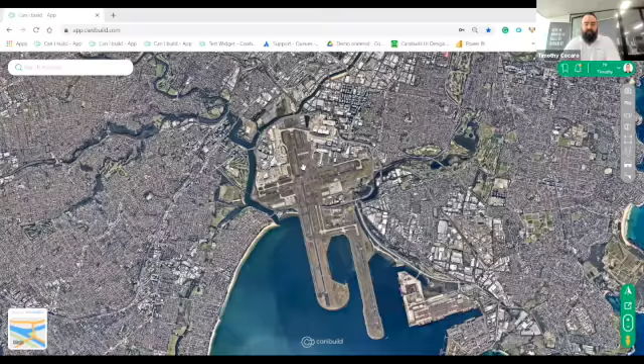For those of you joining for the very first time, welcome to Can I Build, and thank you for joining this presentation. I thought instead of starting over the Sydney CBD like I usually do, I'll start with just showing an airplane, just to remind ourselves that hopefully we'll be traveling soon and taking holidays, because we all know we've had a tough run, especially those in construction more recently. I hope you're getting through the shutdown and navigating all the rules and regs around getting people on site as well. But to kick things off, we've got our dashboard here.

We've got our search address bar at the top left-hand side. Lo and behold, we'll be going to an address many of you may be familiar with, and we'll be attending to that address.

Just a few very quick things to bring to your attention: we now showcase a bit of the context of this site. You can see here we're showing some of the trees around, and that's the same with services and other points of interest external to the actual block as well. So now you're able to get that next door tree and hover over it, or see the next door sewer line, services, or utilities. So we're giving that general context, which is a recent development we have done.

You may notice something new on the sidebar, just below Hi Timothy on the top right-hand corner. Second from the bottom is this little house showing ground floor. Basically, that's giving you a hint as to what's to come in this presentation for the double story.

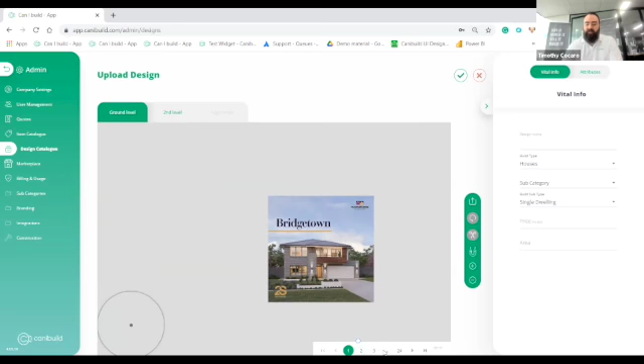For those of you that have come into this upload previously, you'll notice on the top you've got a ground level and a second level. You've also got a zoom panel on the bottom left-hand side to get that precision. On the bottom, you've got these page number tabs that you can flick through to pick the appropriate page. So let's go to a design that will fit my beloved 78 Hood Street.

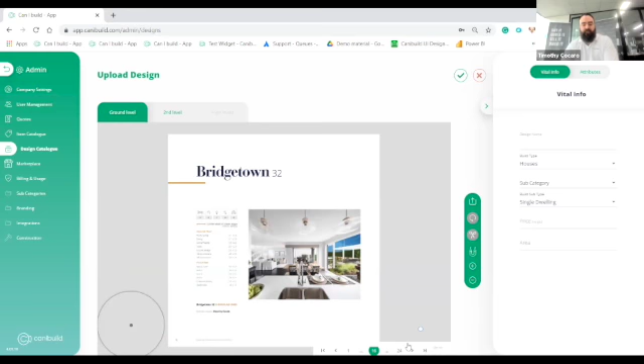And here we are, Bridgetown 32, which fits a 12.5-meter size block. The nice thing is you're able to use this PDF to now fill in attribute data on the right-hand side, making it easier to do it all in the one spot.

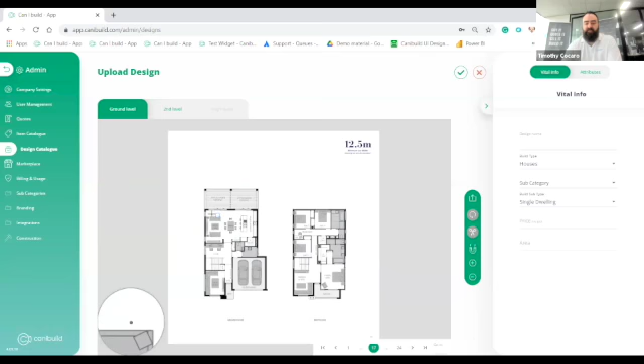So let's just start with the actual core functionality, which is to pick the design. We're on ground floor, we're seeing the design here, and now you're able to zoom in or use the zoom panel on the bottom left to get that precision. I've got a few questions coming through. Hi Tim, can I please include the zone area? Yep, 100% Mark, I'll send through that same email to yourself as well.

So if we zoom in, the first task is to crop the design. Basically you can use it in conjunction with the image you're seeing, the zoom in panel, and click on that. Now, the nice thing is you might notice these green guides—they keep you square.

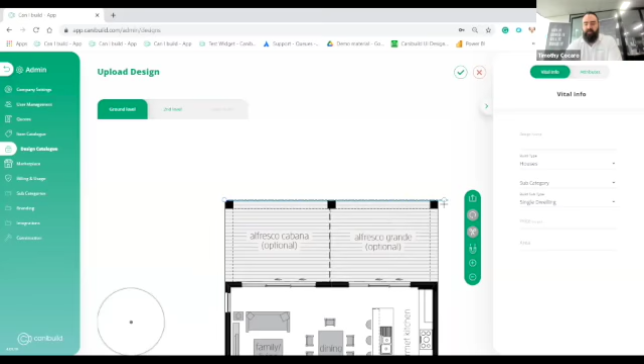If you click on the screen and drag, you're able to drag across as well, or simply zoom out and then zoom back into where you want to go.

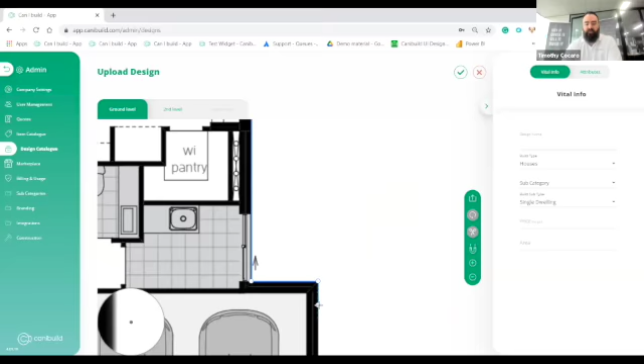You're able to get that nice precision, click on the edges, and simply drag and follow the edge around, because the first task is to crop this image from what's around it. You don't want to include the rest of this PDF, so let's just go around and crop this image.

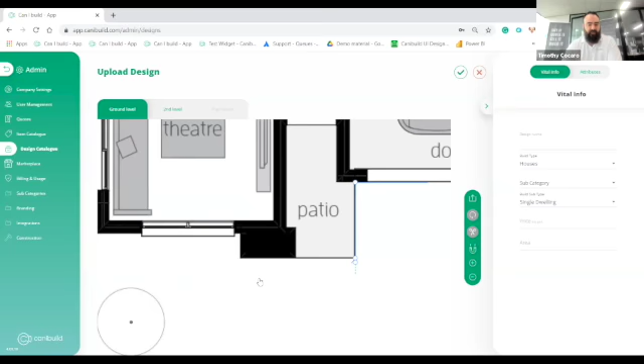Whoever's done this in the past, I'm sure you'll find this a much more pleasurable experience. I apologize to those of you who tried this previously, because it was a bit of a trial by fire.

But now we're able to crop around quite easily. You can see on the last one, it's actually guiding us to finish that node, so we're able to click on that one there, and we now know that we've lined up with this as well.

So now we've cropped this. You just click the scissors on the right here, and you're able to crop that image. We've now done a very nice and sharp crop of the floor plan.

We have a quick question: can I direct from my Chief Architect drawing file, or do I need to do it in a PDF? As of this stage, from the front end, it'll have to be from a PDF.

So you have to either take a screenshot of what you're seeing in your current application, like an image, and use that, or simply print a PDF from within the application. Hope that helps, Mary. So we've done this.

Now the other thing we want to do is start populating a bit of information on the side. We know that the design name is Bridgetown 32, so we can enter that. Maybe we'll mark it as version 3, since I think I've tested this twice before.

And then we've got houses, so we can click 2-story. These build subtypes, it's a single dwelling. We can still put the price.

Let's put 299,000. The area, I know accurately, is 297. So we've got that information there as well.

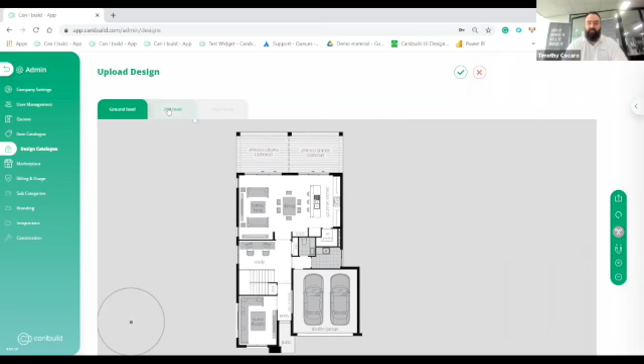Now, the key update and upgrade here is definitely the second level tab. We can click the second level, and it shows you the same PDF for you to start working on, leaving you on the same page, which is really great.

If you need to upload each floor plan separately, say for example it's on two separate pages, all you have to do is click the upload icon on the right here, and it'll ask you to upload a different file, replacing the current file for the second level.

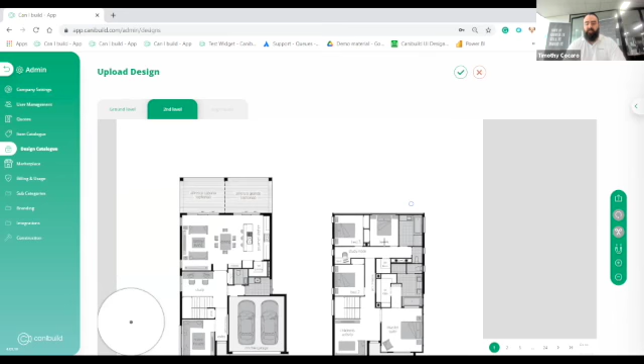So that's quite nice. Let's now crop this one in much the same way, and in combination, you can zoom into whichever level as well.

So let's do that very accurately, zoom in, and then start going around, and let's crop this second story.

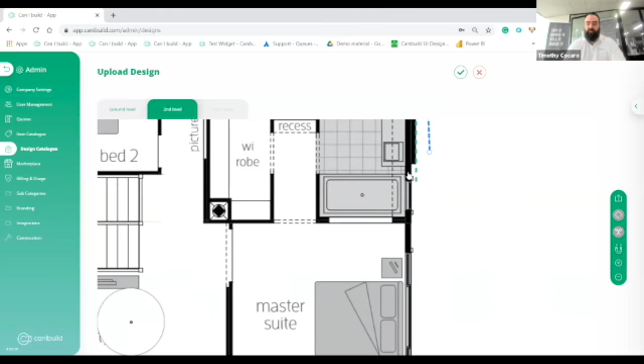Thanks for your patience, everyone. Definitely for those of you who aren't uploading yourselves, this might be a bit tiresome, but very quickly we'll show you how this looks on the actual plan itself, which we're very excited to do.

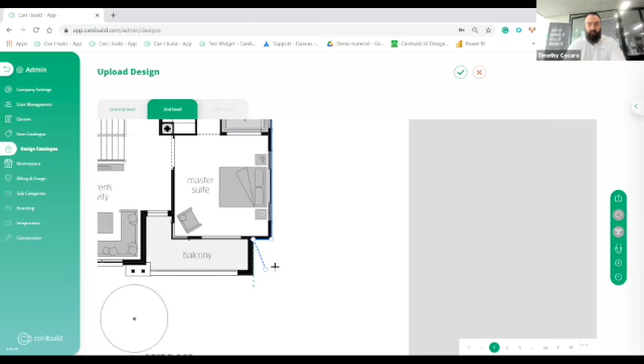So very, very simple, we're cropping all these sides. Click on this, and you can always click and drag, which is always a nice touch.

So let's finish up here.

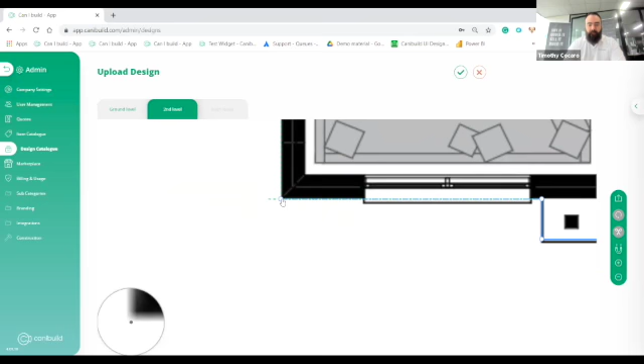So again, we've got this crop, and then we pick our scissors on the right. So we've cropped that floor plan.

Now what we'll be doing is go back to the first one, and we need to provide a scale. We know that the width of this particular property is some 10.67. So we do the same thing: we click on the edge.

And go to the other edge, and enter 10.67. So now we've given it a known measurement, a known scale.

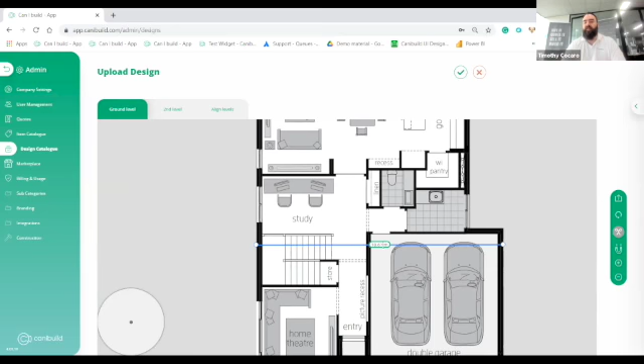We can go to the second level and do the same thing. We know that the second level is 9.1, so let's just do that.

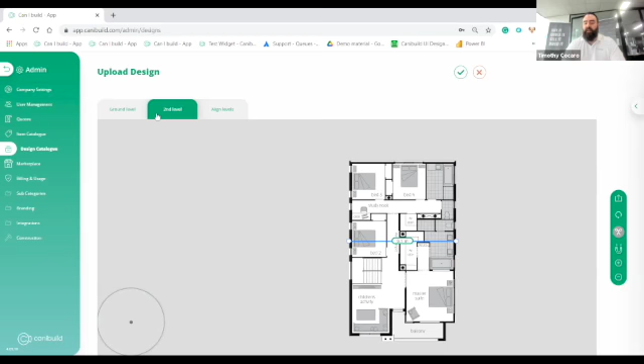So we've done 9.1 now. We've now scaled both floor plans, cropped both floor plans, and now we can click align levels. Now we can align both levels to be able to place them on top of each other, which is quite nice.

I've got a few questions. What if they're a different scale? Eric, if the two floor plans are different scale, that's why we get you to do the known measurements for both, so then they realign themselves. For instance, if you had just a 1 in 200 and 1 in 100 because one of the floor plates was smaller, they'll rescale to each other like I've just done in this case. So when you click align levels, you can see.

When do you size one dimension? You size one dimension after you crop. So you can crop the ground floor and then scale that one, or you can crop both like I did and go back to each tab and scale. My screen is quite small, so it's cutting off the little message at the bottom that's giving you the instructions.

I've got a quick question. Can you click escape to go back and retract your last node, say you did a mistake? Yes, you can, so that's a nice feature. You don't have to start again, and if you do start again, you can just restart. So by pressing escape, you just rectify the last node that you did, which is also convenient.

So I think I've quickly answered the few questions that came through. Now we're at the align levels page, and basically you'll grab this design and align it to the actual floor plan. So it's as simple as that, to simply align.

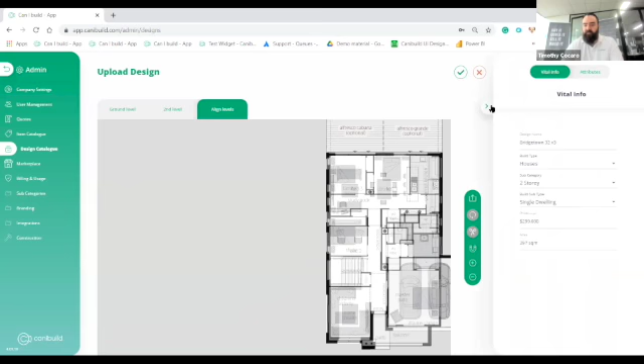Now what we can simply do is click save at the top. Let me just double check that I've got the name right. Everything looks to be in order, and then click tick. So now we've got in houses, we should have additional bridge. So we've got Bridgetown 32 version 3. I only did it once before.

Now, if we go to the front page and to the map view, we'll now be able to access this actual design. Now, before I do, you can drill down and provide even more attributes to this. Let's just, and I've got a few other questions through the Zoom session or from Facebook, I'll just quickly try to answer those.

Does this work for split level homes? Very soon, Mitchell. We'll definitely be including that, do you know how you can see the A, B, C, and D of the drop edges? We'll soon be having an E-F where you can pre-designate the split on split level designs, or also randomly place it. So we're able to do that as well very soon.

There was another question which quickly disappeared, so whoever that was, if you want to ask that, you can ask it again.

Now here, if we click on the microscopic little three dots next to the price - I do apologize, we are wanting to change that - and click edit, you can drill down into additional dimension and attribute information here. So here you can add a range, let's just call this the 2-story collection, or it could be the lifestyle range or the razzmatazz range, whatever it might be. You can also include where you want to show this design within the quote options.

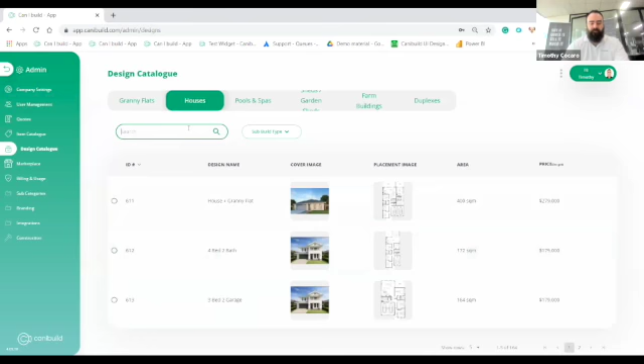There's other attributes you can do, but let's leave that for now, and let's go back to vital info. Then what you can now do is even change the front facade. So let's just change the cover image, and select one there. And now we've got our allocated facade. Now let's just click tick, and we're good to go. This might not show - it shows there.

So version 3, and now let's just go to the front page and let's see how that looks. So now that we're in the ever popular 78 Hood, we can click on designs like we normally do, and then we can search for that design that we've got, say bridge, and then click on bridge V3.

Now, immediately what you'll find is on the actual floor plan, it will show a dashed line representing the first floor or the second story. And more importantly, you can even see the setbacks for the second story as well on the actual site.

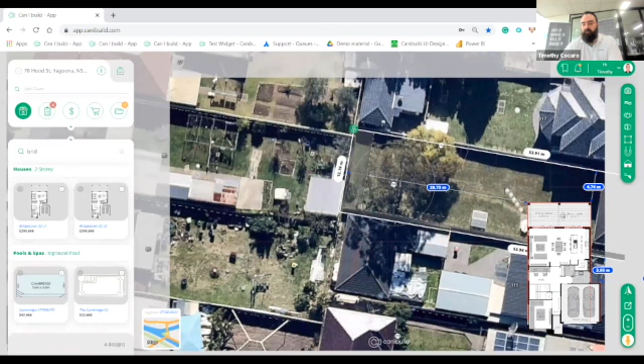So now let's just go ahead and position that like we typically would. Now the nice thing here - we're trying to position that. We see that we cannot position it because as soon as we breach and go in, it will go red. Then if we place it here, the red disappears from the ground floor, but it remains for that second floor. That's because the dashed line represents the second level setback, which we're breaching.

So you're able to then try to avoid that, which we can't because its actual design isn't fitting. So if we remove that second story from that area, you can see it disappears, but we're breaching the ground floor. So we're trying to get this to fit, but we can't.

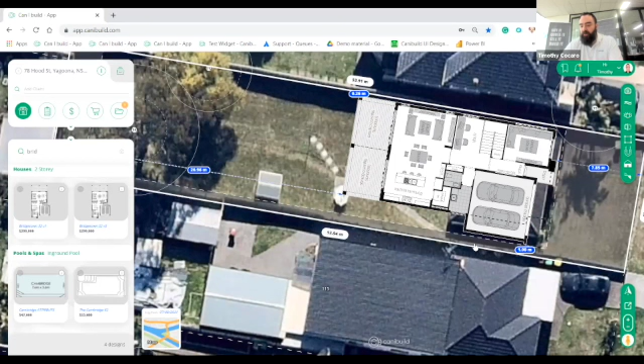Let's try flipping it, and then we're trying to fit it in this way, which just fits there. So this is the only way that we can do it. And we can't even take advantage of the side setback.

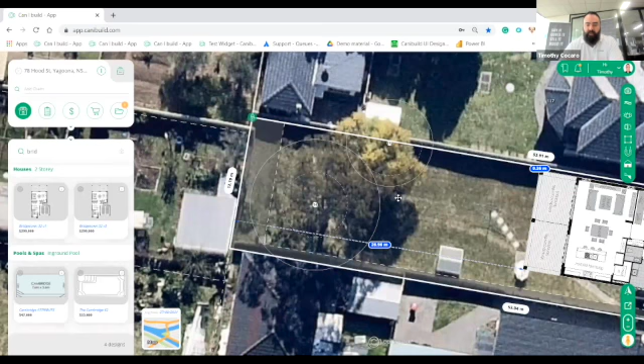So you can start playing around with this and doing it from this perspective, and we can see that it fits. The nice thing is if you start moving it towards the back, for example, and then trying to get that to fit in and move it, you'll see at exactly the point where you'll start breaching the second level in terms of that setback. Now you can see that setback popped up because we've just breached that second level.

So I'm genuinely hoping that you can see this as a major improvement and a major ability to site with a high degree of accuracy while remaining in that 'can I build' kind of way where it's just simple to do. Now I've got a few questions here.

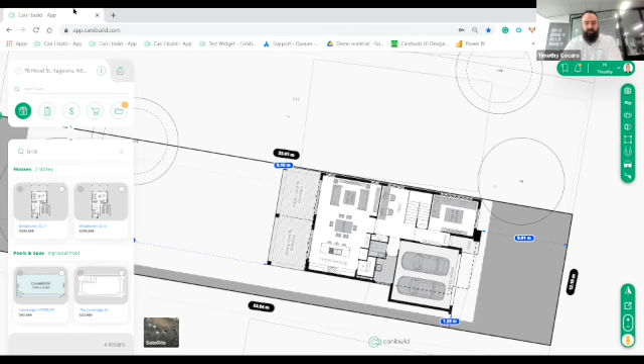Are the provided measurements to the wall? Okay, Mark, I'm assuming you might be from Queensland. If it's the furthest projected point, this kicks in Queensland - so if you're within Queensland, it'll be to the eave. Do you remember when we uploaded this design, we chose the eave line, the eave size? That's because in Queensland, it'll actually show you a dashed line of the eave.

And if I've got time in this webinar, I'll quickly jump to a Queensland address so you can see that, and then all the measurements are to that eave. So if you pick 300, it'll be 300 away from the wall. Given that this example is in New South Wales, it'll go to the wall. So the short answer is it'll work exactly for you.

We've got another quick question. Does this work? Okay, I've answered that one. So that's all cool.

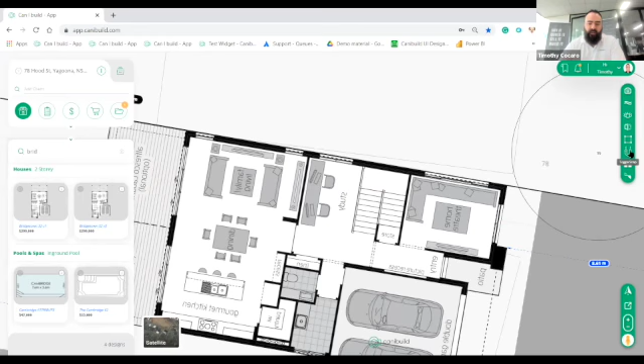How can we rotate or move the image by a small degree? If you're trying to move this image, you go to any of the corners and start rotating it, but it's going to want to always snap to the boundaries. So you can't change it to 1 degree or something like that, because it'll just be snapping. If you want the snap turned off, on the right-hand side you simply click that little magnet with the electricity bolts on top, and then you'll be able to start shifting this to small degrees and positioning it. But typically you'd want to line that up with a boundary like we are here.

Now, the other nice thing with the two-story update we've done: on the left-hand side, if you click on Rules, you'll notice we've now got ground floor and first floor. So it's telling you what you need to be and what the breach is. In a very similar way to the single story, now you can see where you're breaching the top, the bottom, everything, so you've got full understanding of exactly what's happening and where you're compliant and where you're not.

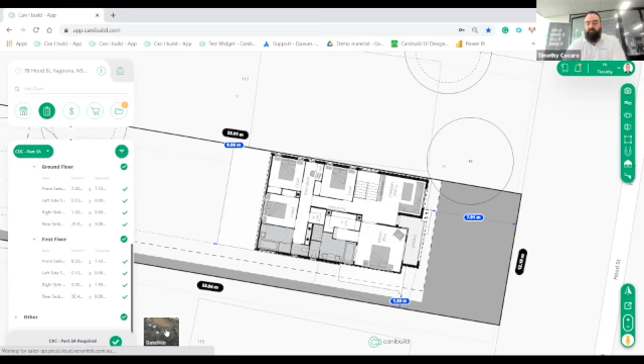The other thing you're able to do, you may notice on the right-hand side we have that little ground floor, this new house icon. That's because you're able to switch to show the upper floor level. It'll shade out the ground floor so you can still see where that's located, but you're now able to show clients how that upper floor looks, which I think is a nice feature.

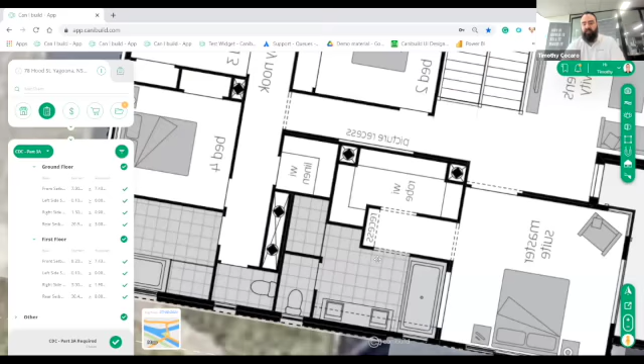Typically, from our side, like I always said, we're very biased—we love the app, but I think this is pretty cool. I genuinely hope you guys think so as well, because now you can start zooming in, seeing the second floor, and then show the ground floor and really work with a client, showing them everything on how their build looks on the block of land in an easy, intuitive way. I really hope that is well received.

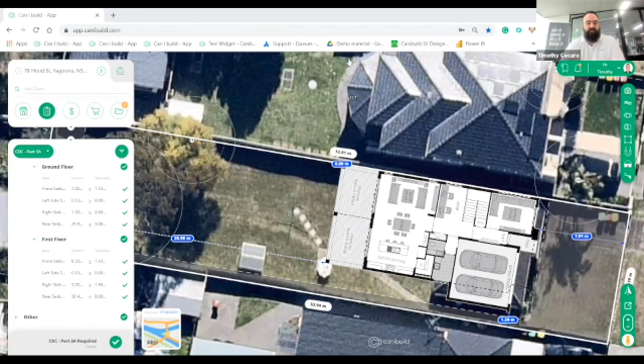Thanks, Mark. Thanks for the kind words. We're all terribly excited about this. I think we won't be as excited as when we release multi, I'll tell you that, but I'm sure second story—it's the first time anyone has seen the ability to do two-story in this easy way.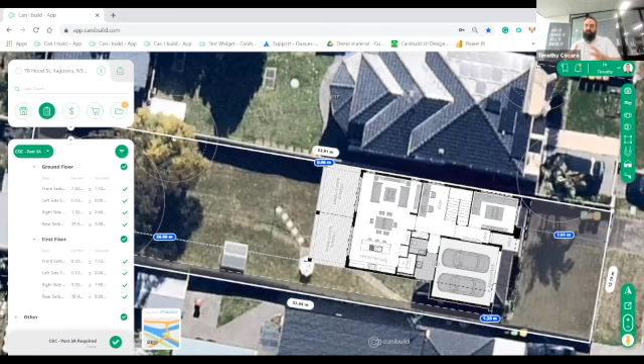So just to very quickly recap, we've done an upload. The functionality of upload is a lot easier. It snaps to 90 degrees. You're able to reverse an incorrect node by pressing escape. You're able to add the attributes. Now, what happens when you want to generate, say, a flyer, now that it's two-story? Let's just see how that looks.

We've clicked this design. We click on, say, flyer, and site plan, CAD files—they all work in exactly the same way. If you click flyer, click order, agree to the T's and C's and go checkout, like always we can generate this flyer, and let's see how that looks.

While that's generating, I've got another quick question: is the second story setback rules based on an assumed average roof line to the ground level height?

Jane from GJ—well Jane, first of all, thank you for your patience. I think you were probably one of the first people to ever really articulate the need for second story, and I apologize, time flies, it has been a while.

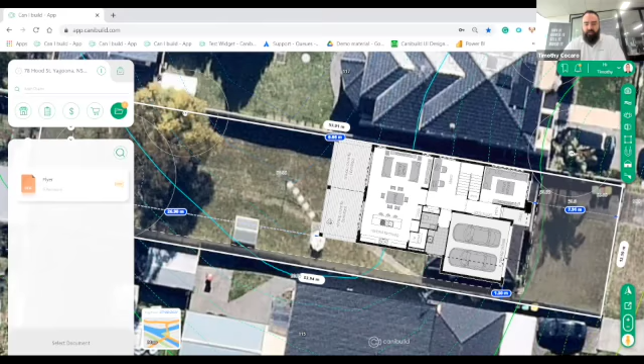In answer to your question, yes, right now it's taking an average because we are working on the actual roof ridge as well. So it's not going to take into account if it's a flat roof or a pitched roof, or if it's 15.5 degrees or 18 degrees—it's still not exactly there. But I hope you can see this is a tremendous leap forward to getting something hyper accurate. We've already got the ground levels, which everyone should know by clicking the contour button and showing that, so it's not too far a jump for us to finish the last bit. We've gone land, contours, ground floor, first floor, and now we're just going to be able to automate that roof design as well to complete the entire build. So hopefully that answers the question.

Now we've generated this flyer, so let's have a look at how that looks. I click on flyer, click download. And then we've got our flyer—this is how it looks out of the box with the information that I've put in.

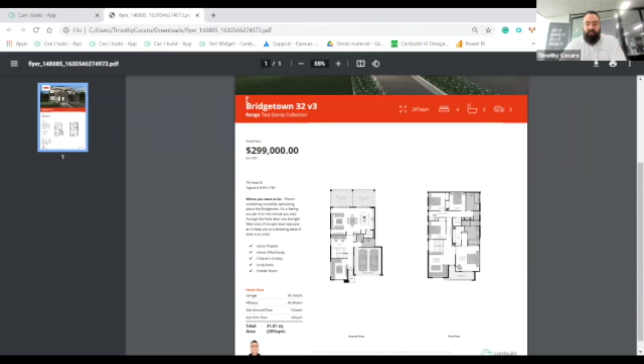So it's going to be branded and stylized, obviously in your company colors. It's got the facade that we've picked, it's got those attributes that we've entered, the design name, the range, the price, the address, the description, the bullet points we've added, the dimension box, the sales consultant's details at the bottom. We're also working, and we'll release this today, to show these floor plans larger—the resolution is there so we'll have larger floor plans. We'll be tweaking a few things like the size of the summary of the dimension boxes, but I hope you can appreciate we've just done it live in front of everyone.

That's a pretty cool outcome.

And again, obviously you can change your colors and so on, but we stuck to the Acme Corp branding.

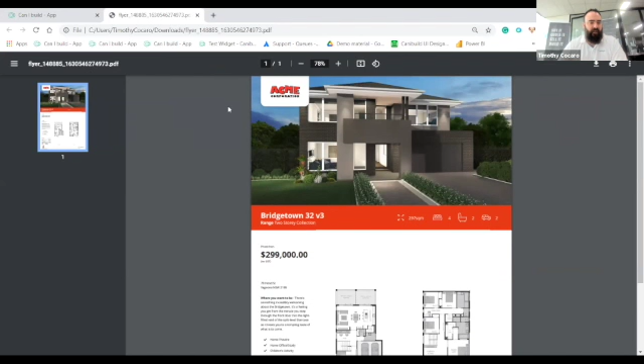Jumping back, we've got a few other questions. Fantastic, yes, thanks Jane. I appreciate that you've been waiting a while for this second story, so I'm glad you're liking it so far. To recap, we've uploaded a design and set attributes.

Those attributes are what's feeding into those filters. So if you're playing around with these filters and they're not working, it's because there's no attributes behind them. You can add those attributes yourselves, or let the administrator know. You don't have to go design by design - if you go to admin and then design catalog, you can export all the attributes in bulk, update them on a spreadsheet, and re-import those attributes in bulk.

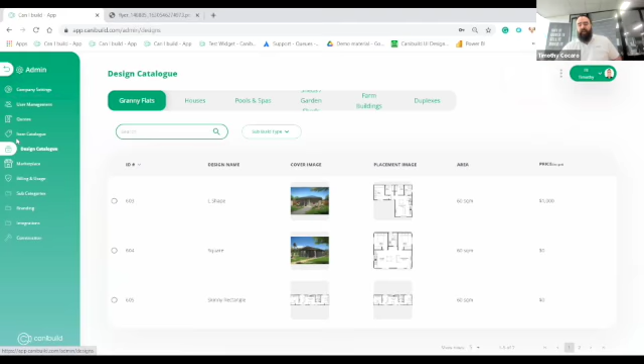You can sort of edit those, and as always, we're happy to help you upload these - we'll never charge for that service. But realistically, if every single one of our clients asked us to do all their designs today, aside from having a mild heart attack, it's going to take a little bit of time, so we're going to have to work through that.

That's why in this session I've gone through how to upload. If anyone needs a one-on-one session to help you upload for yourself, we're happy to do that again. But I hope this session showed you how easy it is and how nice the outcome can be.

So we've done that. Now the next thing I want to show in this presentation is the ability to show that greenfield housing code as well, particularly in New South Wales. But even for those of you in Queensland or other states around Australia, or even overseas in the US, the benefit of talking about this feature is just to show you how specific we can get things.

So if there is a specific region or area that has a specific code or rule override, canibuild can handle that as well. If there's one we're missing specific to your area, please let us know and we can get it done in much the same way as what I'm going to show you now.

So let's just jump to an address. My heart is aching because I'll have to go away from 78 Hood Street and show a different address. Let's just go to one in Kellyville, so we can show both these precincts - the greenfield housing area and outside - and you can see how that looks.

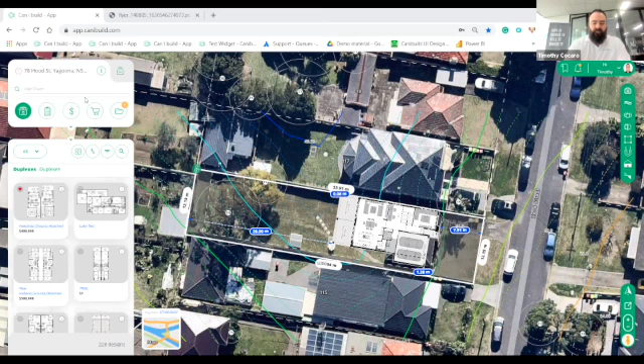Before I do, I just wanted to very quickly reinforce - oh, actually, I can just go straight to the address.

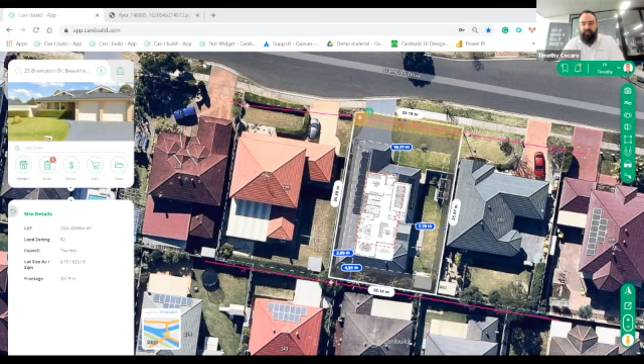So here we've got that address that we've come to - it's in Beaumont Hills. Now what you can see, again, we can see the side and rear setbacks in terms of the positioning. And I think my light just turned off because I was not moving enough.

So we've got this floor plan - we can see the front, side, and rear setbacks. Now the nice thing - and if you breach this rear setback, this is another 2-story design I've done.

You can see how that works there as well, which is quite nice. But the main point of coming to this address is twofold. One, you can see those surrounding easements, those sewer lines, the zone of influence specific to this block, giving you that context in much the same way as the trees did in 78 Hood Street.

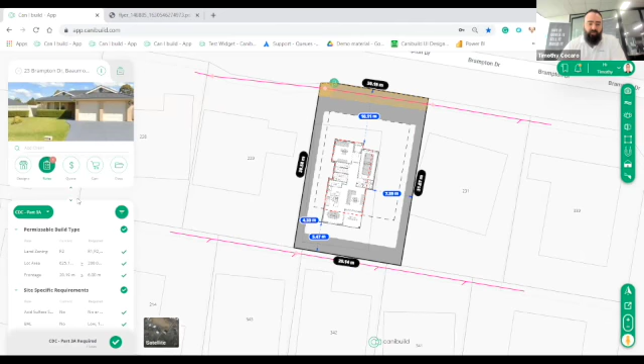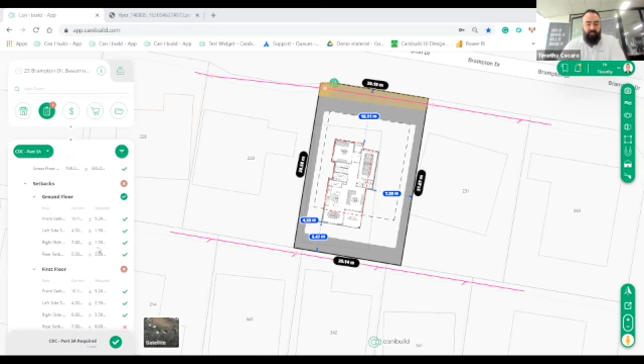So now if we click on rules, what we'll be able to see very clearly is this is part 3A of the CDC, the housing code, and basically it just shows you that the setbacks are as per normal.

Everything seems to be as per any other block. But if we cross this, if I go to aerial view, here we can see that in terms of the rules, everything seems normal. But if I go to the next address, which is over this creek, that's where the housing code kicks in. I just wanted to show that we're on the left-hand side of the creek, and I'm going to jump to an address over here to show you the difference.

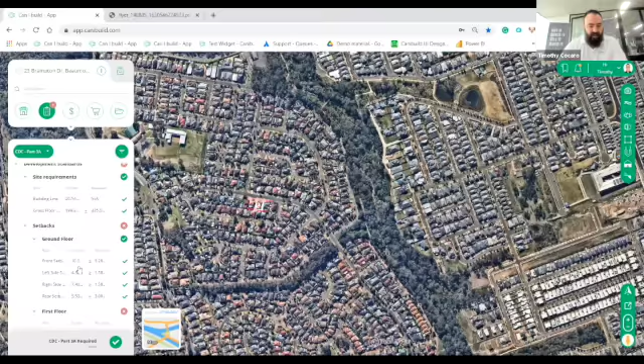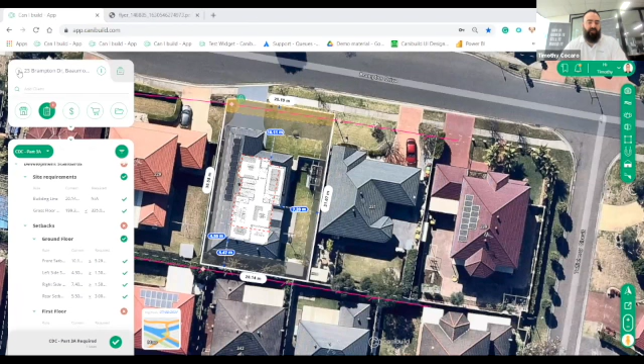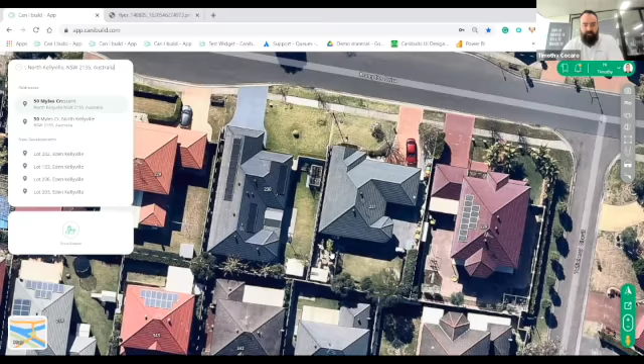So that sort of comes in. Even in terms of these setbacks, the front setback is a calculated 5.29, and you're able to show where it changes with a different area. So let's just go to that new address: 50 Myles Crescent. So let's jump there. If we go to 50 Myles Crescent and zoom up, you can see I'm on the other side of that creek, just to reinforce the point.

Now let's just pick a design. Let's go designs, I can't help myself. I'll go to my second favorite plan, which is Bondi.

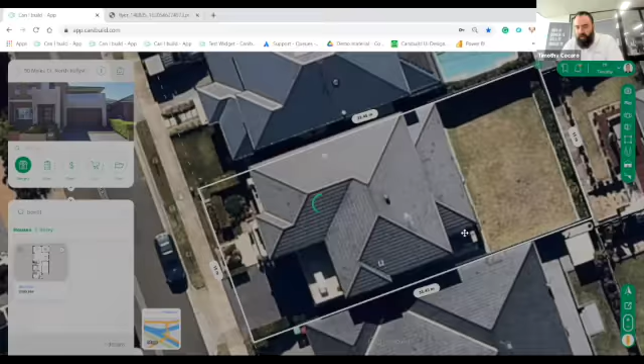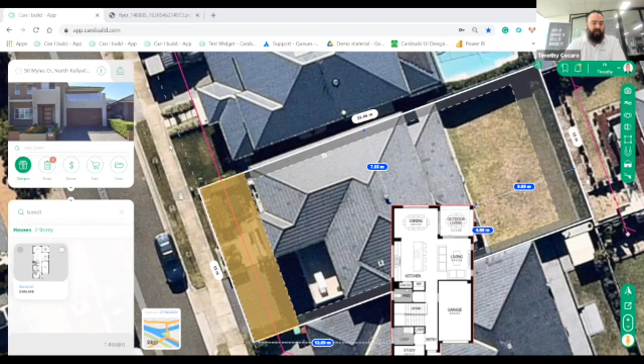And while that's loading, I've got a quick question. For the fly, can the flip version be printed? Right now, the answer is no, it's not done where you flip and on the flyer it shows it's flipped, but it's something we can do. I'll jot this down, Kim, and get back to you with an ETA of when that's possible. But that shouldn't be too hard for us to do.

So here we've placed the design. Again, you can see that context of the sewer lines around, which is quite nice. And then we position this build here.

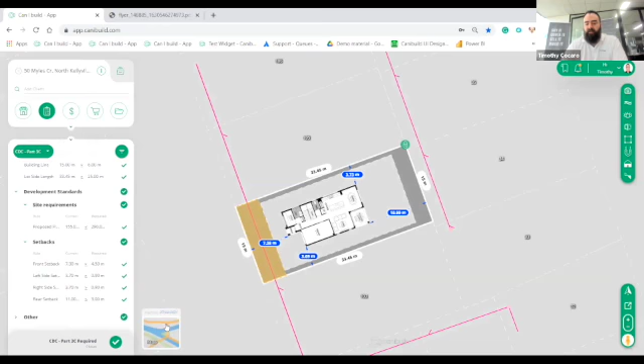Now, if we go to the rules, we're on part 3C again, but you see a new rule here: lot side length, making sure that you're compliant with the minimum lot side length. Your front setback is 4.5 meters. So now you've got the comfort of no matter which address you're placing, it is applying exactly the right setback all the time. It's even checking that lot side width, which realistically is mostly 25 meters, but I'm sure everyone here has hit a corner block which might not comply, or some oddity infill kind of block.

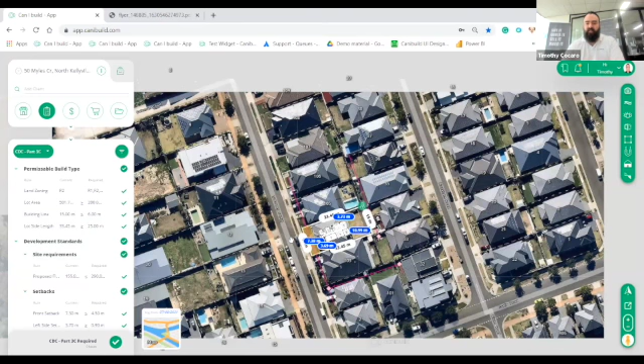That sort of taps out of that ability because of that rule. So we've done that as well. I just wanted to touch on that in particular, to give you an idea of how specific and detailed canibuild can be without introducing any additional complexity. So again, very happy with that.

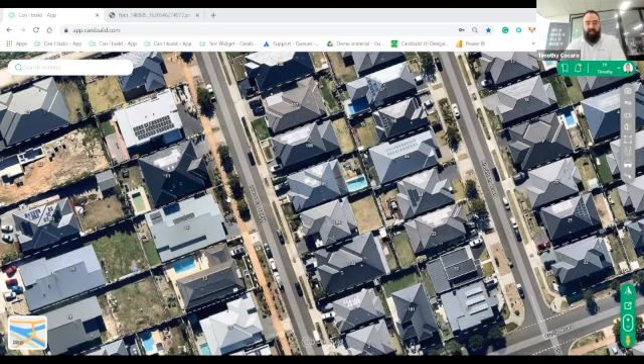While I'm there, I might just quickly jump to a Queensland address, purely to give those of you in Queensland that view that it is the furthest projected point. Let's quickly do that, and I'll jump around again as well. So let me just pick an address - one second, guys, and like always, feel free to ask any random questions, even if unrelated to this session. So here we're in Queensland, and we've got this site here.

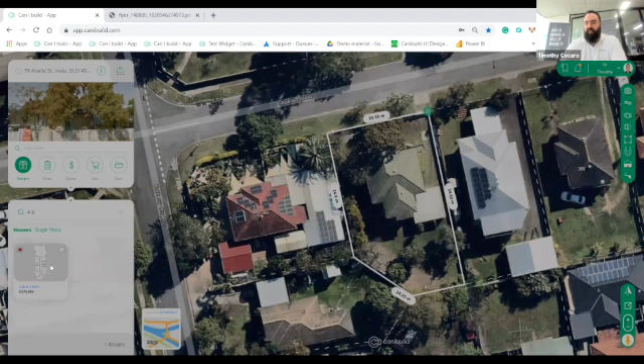If I pick my trusty 4-bed 2-bath, and for those of you in New South Wales looking at this, yes, Queensland's ahead of us in the amount of services that it shows. Unfortunately, that's the reality of the situation.

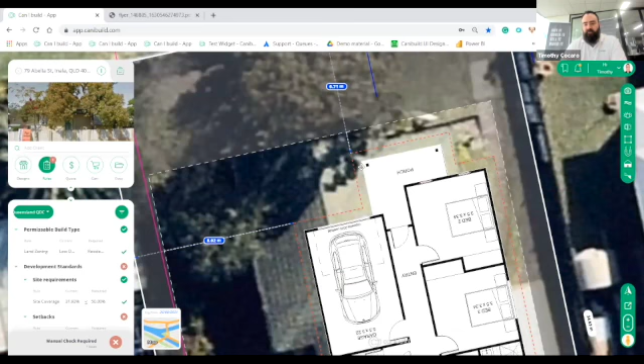So if we go here and click on rules and switch to the QDC and zoom in, you can actually see that these projected points are the furthest, and that's the eaves. So it is detailed in that respect. Hopefully that answers the previous question and shows it in real life, and gives those of you from other parts of the country a view of how things look for others. But it works in exactly the same way, irrespective of what jurisdiction you're in.

Are setbacks running for New Zealand sites? Yes, they should be, Phil. If they're not in your specific area, I'll definitely want to touch base with you straight after this. So I'll definitely reach out, Phil, and make sure that it is.

The answer is it should be. But given your question, I'm assuming it's not. So let's touch base straight after this. Hopefully that gives you that context.

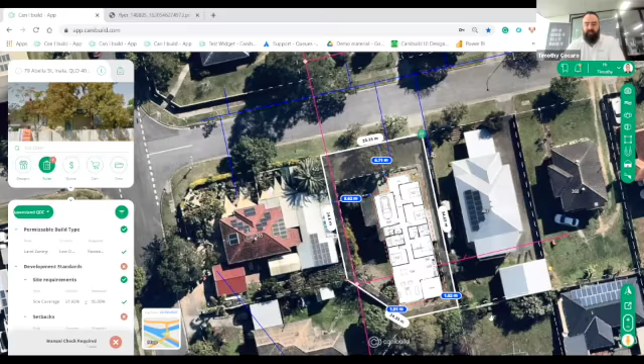Can eaves be added to upper and lower floors? Good question, Mark. Again, the answer right now is no, but it's something we definitely have to do, so I'll get back to you on the ETA for that. It shouldn't be too much of a task, given that if we can do the eaves for the ground floor, we definitely can do the eaves for the top floor now that we've got 2-story.

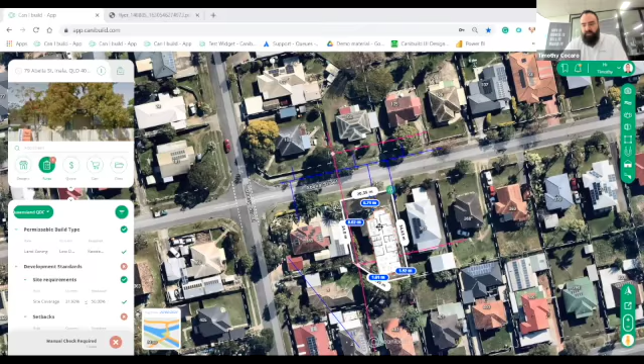What was the automatic placement locating the house to setback and side setback? So here, if we move this anywhere close to a setback, it'll automatically snap - that's done via this magnet tool here. You can turn that on and off, and that's what's dictating the actual snap to that boundary line. So particularly on, and then if you turn it off, you can start rotating and not get snapped.

A quick tip to save anyone from going slowly insane: if the block is really small, you can use snap, but just snap it once and then turn it off. Given that if there's a very narrow block, it'll just keep trying to snap left, right, and front - snapping to whichever is the closest boundary.

So if I put this in the center here and it's on angle and I move it towards the front, it'll try to snap to that front. If I move it back and then move it again and then move to the side, it'll snap to the side. So it works intuitively, but on small lots it might be a little frustrating. You can turn that off via the magnet on the right-hand side, just below the square tool and just above the new 2-story tool.

The snap feature is also on the upload. So when you're aligning the two levels, you can turn snap on and off, because it'll try to help you snap to the ground floor to make sure everything's nice and level. You can see how quickly I did that - it's pretty easy now, the upload process.

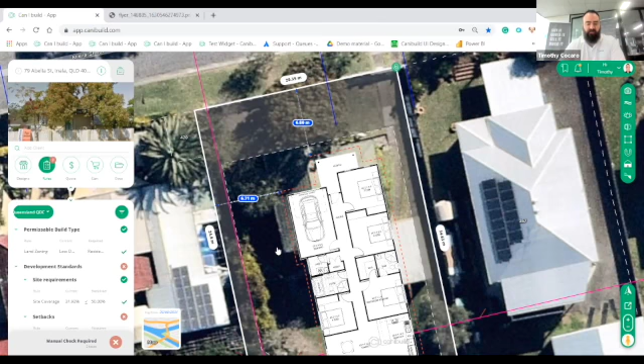Got another question from Ellie: just wanted to find out how the CDC approval process works in the cart section. Does Can I Build send someone to the location to do the inspection? Yep, another good question. So I'll go to that and quickly show you.

The question was, in some of these items in the cart, how do they actually work, specifically the CDC approval process. So if we go to cart and look at the CDC approval, which I'm imagining you're a pool business, let's just add a pool. Let's filter down to pools, because the items in that catalog are dictated by what build type you have as well. So let's go to cart and scroll down to CDC approval.

Yes, someone will come out to site and actually do those inspections - that CDC approval process does include that. If you click on it, it'll go through what's there, the ETA, and the cost. Unfortunately, Can I Build, as advanced as it is, still hasn't perfected the ability to send out a drone to do your CDCs for you. But someone definitely goes out, assesses that within 7 days, and gives you the approval.

The nice thing, like any of the items in the cart, is you can add your own margin, add your own items, and even associate these items with your own consultants. And as always, if you purchase one of these items, you can connect it to a payment gateway where you can enter the credit card details of the actual client and transact that. Via Stripe, those funds go directly to your account as opposed to Can I Build. So essentially, you're using this as a credit card facility to easily show a client how your build looks and what your next step is.

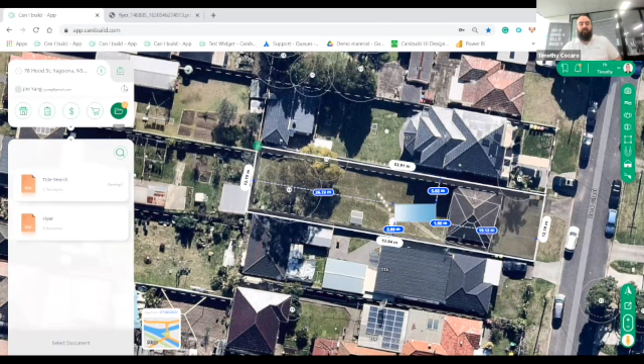I hope you take advantage of that. If you've got any other further questions, feel free to reach out and I'll send you an email myself following from this if you need to chat more. So we've jumped on that. If anyone else has any other questions in relation to the cart, feel free to ask. The other points that I wanted to raise in this webinar - let me just scroll up because I've got the memory of a goldfish.

So we've spoken about double story, we've explained how to upload, and we've also touched on the Greenfield housing code. The other thing that I wanted to touch base on, or else Jim Harris would shoot me for not mentioning it, is the number of estates that we have on the system.

So like always, you can search for a new estate by typing in the name and scrolling down. You can search by lot or estate name, or you can simply click show estates and you can show all the developments. If anyone has spoken to Jim, you'll know he just loves seeing that number keep on increasing - we've got 640 something estates.

If you zoom in, you'll be able to see each one of these pins actually represents an estate that we have on the system, which no platform on the planet comes close with the amount that we've got. And the nice thing is, if you click on it, you see the entire estate as a whole.

I'm hoping that everyone knows that functionality is there and ready for you to use. Whether you're a pool builder looking to build a pool in the back of a house where the land has yet to be registered, you can now start getting these relationships with home builders to forge partnerships, or vice versa - home builders that don't want to get into the pool business game can partner and tell the client to speak with these guys and show how it all works, so everyone can be working on the same page, which is really nice.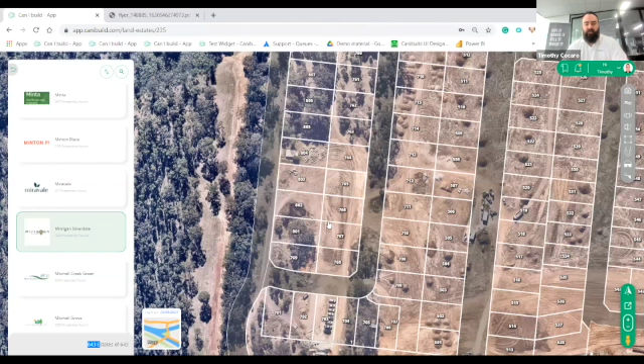So there's another quick question from Mark: can the cut line be shown on the floor plan?

Yes. Just to let everyone know, I'll load this screen up so I can talk through it again. But before I do that, I'm going to load up the roadmap so everyone can be reminded as to what's coming up next.

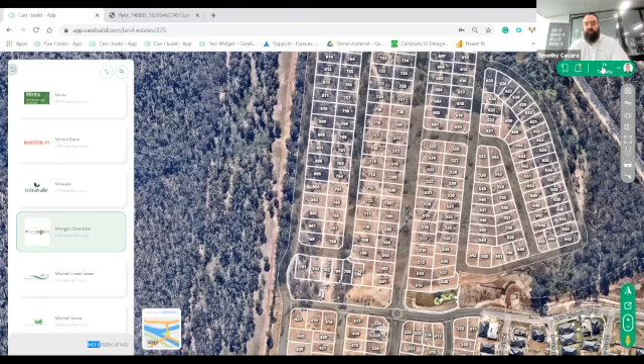One of the key things is auto site cost and the ability to know what the cut and fill actually is. So if you go to admin and go to construction, you'll notice we can already start doing things like max cut, max fill, automatically 50-50 cut and fill, building offsets so no one cuts sharp against the brickwork of the house, nor does a pool business just literally cut out the volume of the pool and let the surrounding areas be sloped. So you've got your building pad offsets.

For those of our clients that might be on today doing prefab, modular and raised pier construction, you can even include max height and max ground clearance for the plans that you drop on as well. So all of these will feed into the ability to automatically calculate the import and export of fill and the cost of drop edges, and be able to factor that into a costing for you guys.

Just to reinforce that point, let me quickly load in my roadmap. And if anyone's looking at my video screen, I'm not waving into the distance - I'm just trying to turn the light back on.

Technology, yeah guys, sometimes it drives you insane. But not all times.

Let me just do a new share of my screen. So here we've got the roadmap. Starting from top to bottom, we've done snap to boundary, we've done the payment gateway, which is what I just showed in that cart functionality. We're aiming at 500 estates, and this is probably in July. This is a good point to show you how many estates we're actually loading day to day. So very shortly we'll hit 1,000 and we'll surpass 1,000 very quickly.

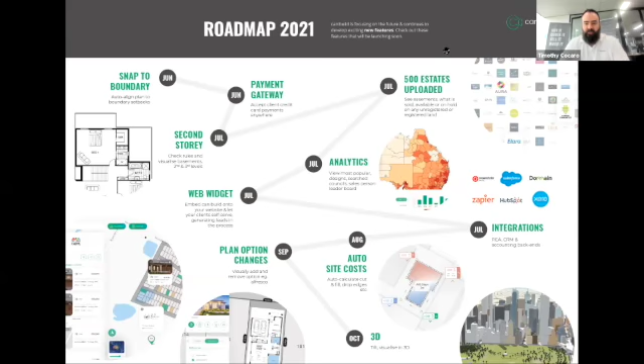Let me just quickly share back. Sorry for forcing everyone to see my face again. Let me just quickly jump back.

These are the attributes that feed into that ability to make sure you're not doing something as a business that you don't want to do. So that's quite good, let's jump back here.

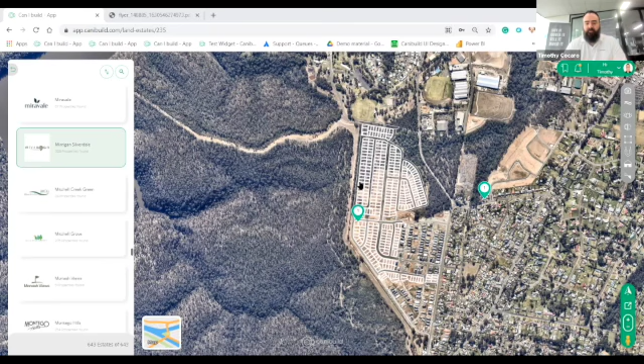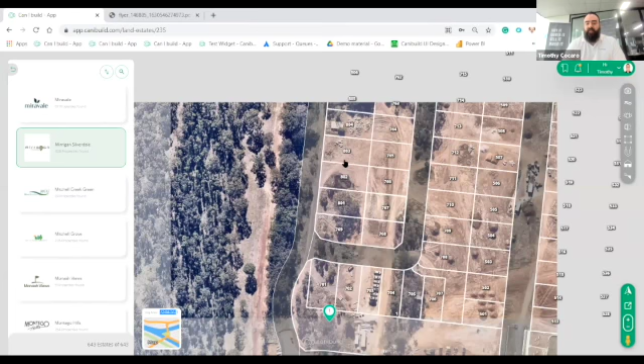Now we show the estates. We've got a few other questions. Does the development need to have titles before we can view it? No, that's the whole beauty of these developments on our system. If you zoom in here, you can see the date of the photo on the bottom left-hand side, 12th of the 8th. You can see here that there are no roads - these blocks are definitely not titled. So these are all unregistered blocks of land that you can still click, drill down, and start siting on like any other block. That's the beauty of it.

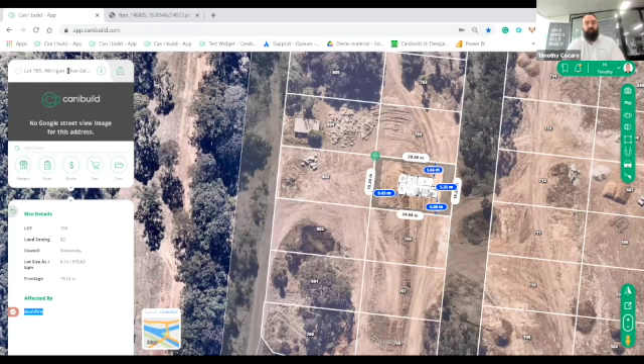On the left-hand side you can see this one's bushfire affected. You've got your setbacks, and you can start generating your flyers, your site plans, and working everything from that perspective. The other thing we've been promising for a while, which is coming very soon, is the ability to show a lot of detail.

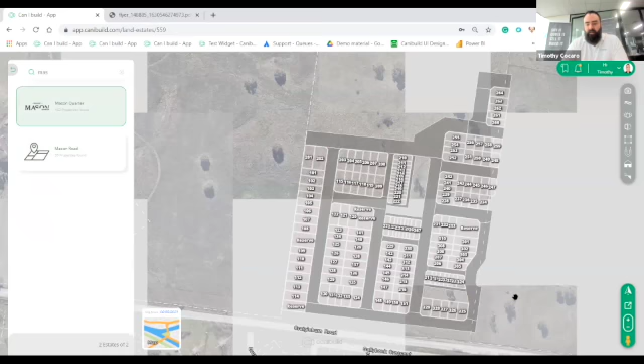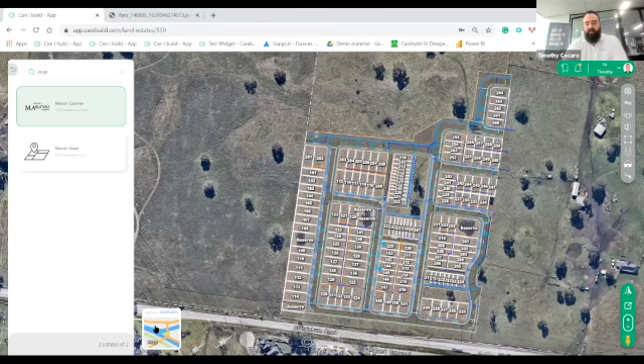If I drop to a development in Victoria for those Victorian clients - Mason Quarter, you can see here when I zoom in the level of detail, and this is one from Cedar Woods developments. You can see here you've got crossovers. If I switch to the architectural view, you can see drainage lines, easements, stormwater, the whole line. You can hover over and see what each of these are and how they affect the block.

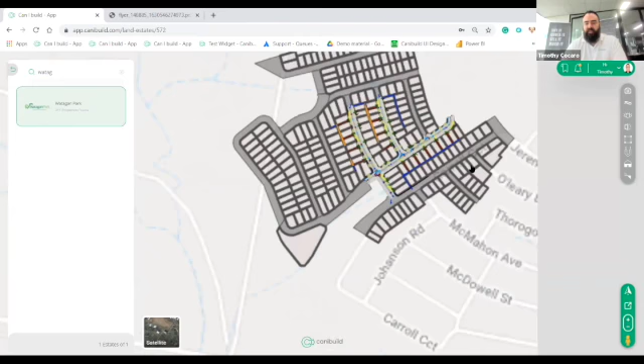Another one at that level is Waterton Park from our partners at Johnson Property Group. If I jump onto that one, you can see there are two sections of development, so you can see both here. If I zoom in, you'll see a similar level of detail. The only difference in this particular development is you can hover over the blocks and see which ones sold, which ones are on hold, by their color coding. And that's going to be more and more.

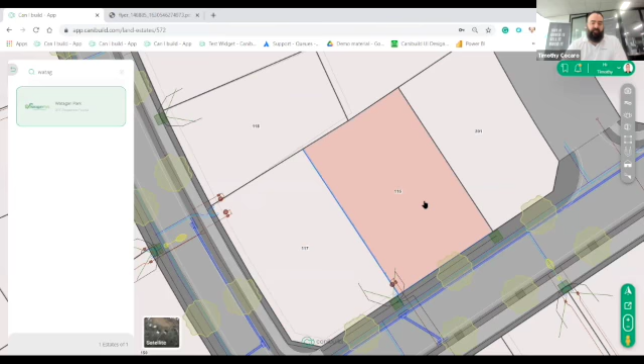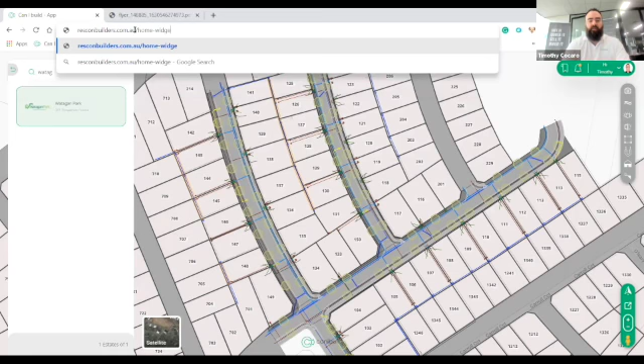That probably leads into the web widget, because you can even put a lightweight version of Canibuild embedded on your websites, on your landing pages, and show the same information we're showing here in a much more simplistic way, to allow your clients to self-serve and start playing around with your designs. So if I go to one that's live right now in terms of this web widget, just to show you - our previous webinar was all about the web widget, so feel free to log into YouTube and have a look at that.